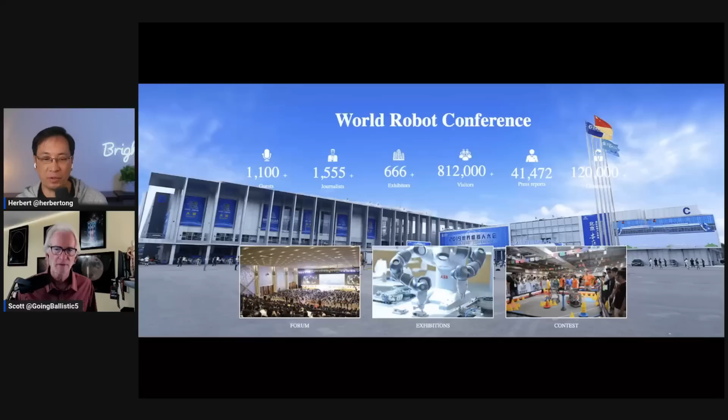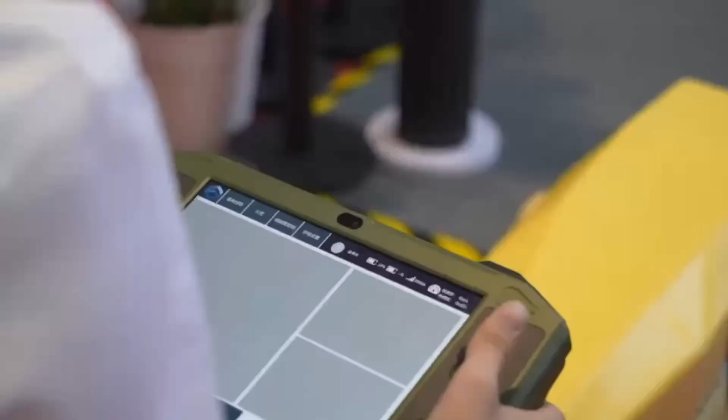Okay, so that was just looking at a 2-wheeled robot. Here's some humanoid bots. This is rather interesting, it's only got 4 fingers. Some flexible bots to get into very difficult accessible areas. That's a standard industrial robot, simple pick and place robots, and obviously some drones that can even flap. Again, that's a standard industrial or cobotic arm we're seeing there. So they're showing a mix of all the different types. It wasn't just humanoid bots, even though a lot of them were there. It looks like probably an exoskeleton of some sort to help assist, a type of lift assist that could be used. And of course, walking dogs—they've been very popular recently.

Yeah, I'm going to pause it here because many times you and I report on bots and we think the bot is doing it on their own. And I don't know, more than 70-80% of the time, it's actually a human controlling it, like this one. Yes. Now, what you see in the hand is what we call a teach pendant. Okay, so that's the controller. You see a big red button up there, which is the e-stop button, and a bunch of other controls on a flat screen that allows them to see what's going on, change the program, record positions, make modifications, and then let it run. A lot of times what the bots will do is faithfully replay what they were just taught.

So you showed a bunch of things and then it's just a playback. Others, it might be intelligent to do something else. Like here, this is a massage bot, which is probably just supposed to go from 2 different points, and along the way it's just trying to control the pressure that's on there. And then we're seeing also some pet bots here.

So that massage bot looked like a standard cobotic arm, it wasn't anything special. It was just outfitted with something a little bit different to allow it to maintain the same kind of pressure. So in this case, the trajectory is constantly changing based on the amount of pressure it's feeling as it's going over. It turns out to be a rather interesting, simple way to teach a robot to go over a very complex surface. You just say, start in one corner and go to another, and as it's pushing, depending upon the amount of pressure it's feeling, the bot either goes up or down. It's as simple as that.

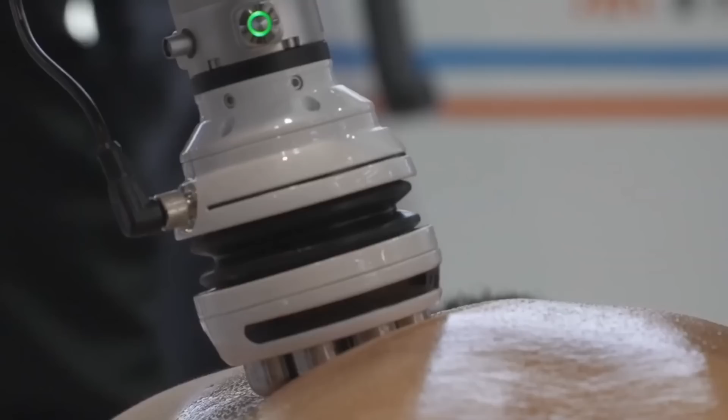Yeah, I think this is not just massage. I think you can see that those are 3D lipolysis that you can go to spas today, pay hundreds of dollars, and then they have a technician doing this on your behalf. Now you don't need to. And so it's actually going to take over jobs already, this one right here. It's pretty easy to be able to go over a surface, let's say you don't have accurate data on it right away.

And then, we're seeing some robotic pets. We've looked at a couple of them. I'm not sure what makes these things special. I remember seeing bots that looked very much like this, 30 years ago.

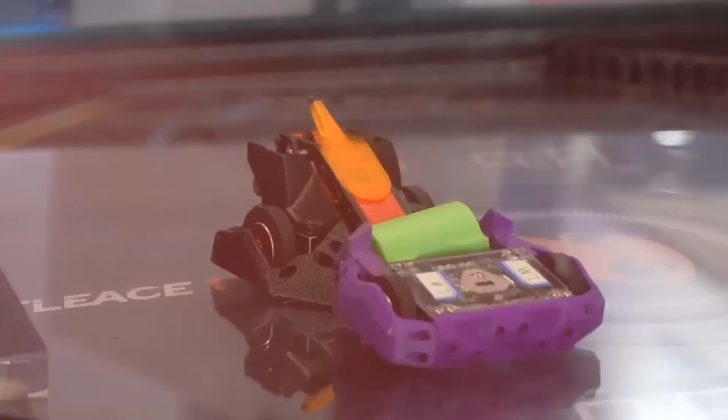And then, just some smaller ones that can be really good for teaching the next generation of engineers, I guess you can say, on how bots are working.

Again, just showing that you can do balancing with something like that to be able to move it around. I'm not quite sure what the point is. It's sort of like a Segway that's autonomous.

And this is a bit creepy, going back there for a second, because that reminds me of Doc Ock from Spider-Man. It's evidently something you can put on your back, and now you've got 6 extra arms. I'm not exactly sure what you would do with that.

The only thing I've seen even close to that is a surgical robot called Da Vinci that they use in a lot of surgeries, which seems to have all these arms all over the place to be able to do something.

I'm not sure how you would control that. Just imagine for a second if you were able to have some sort of brain implant, could you imagine trying to control 8 arms? Your 2 natural ones and then these other limbs?

Robots can, but I see that they all have fingers. But like you said, I think this is just more for demo. They all have fingers, which is one of the things you've taught us to be looking out for. And they probably have to have a lot of their own onboard control system to kind of do something, and you just kind of somehow roughly command it to do something and it just goes ahead and does it. Of course, it could just be for dance as well.

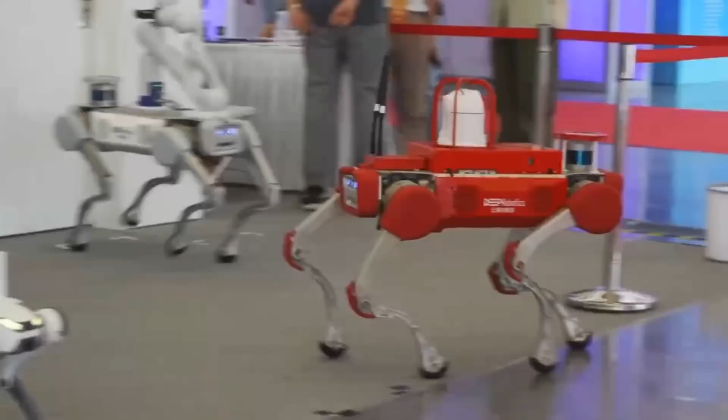And then I believe these are a couple of bots that were designed to actually be in the image of their inventors, kind of like the doctor in Star Trek Voyager, remember? So I know it got a lot of attention being able to see a robot that looked very human-like. I'm not quite sure what the fuss was about after looking a bit closer, because I've seen things like at Disney World for over 30 or 40 years already, where you have these animatronics that look very human-like.

So I'll be playing a clip that's going to show a little bit more of how these human-like robots work.

The dog bots are very popular now. There are many, many companies coming up with different versions of them. And now this one's rather interesting because it's got enough power to be able to do a flip like that.

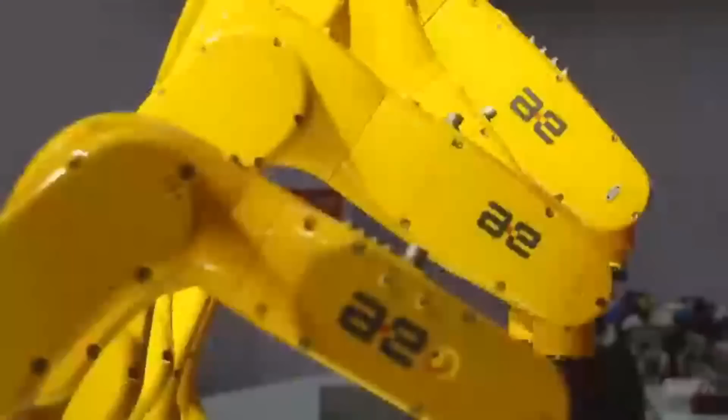These are just the old school bots, the old normal industrial robots. Nothing really new here that you're seeing, except that it may be yet another company being able to produce these, and then just showing different kinds of applications of cobots versus your standard industrial robots.

So like we said, some of these robots have been around for many years, but being able to do a specific purpose-built task, you don't need a humanoid bot for this specifically, but if they become cheaper and more widespread, then they're going to be very useful.

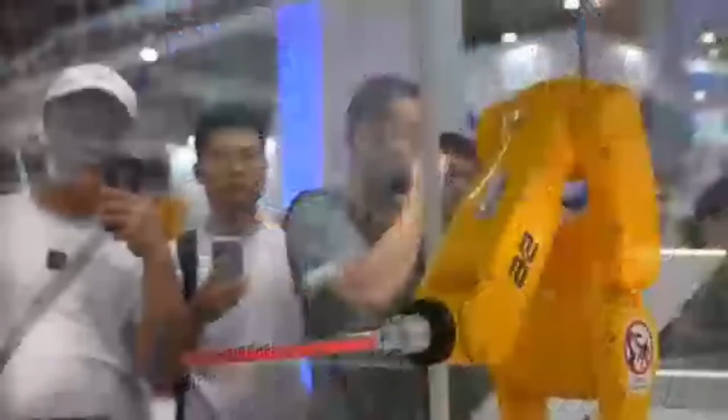Just this alone, right? The ability to make ice cream. Yeah, and they've been around a lot, these robots that can serve ice cream that have shown up at various trade shows for well over the past decade, if not longer. And it's not 100% clear that you really need a robot to do the whole thing. You could probably have a specialized mechanism that could also do it as well. But it's more or less that people like the attraction of it.

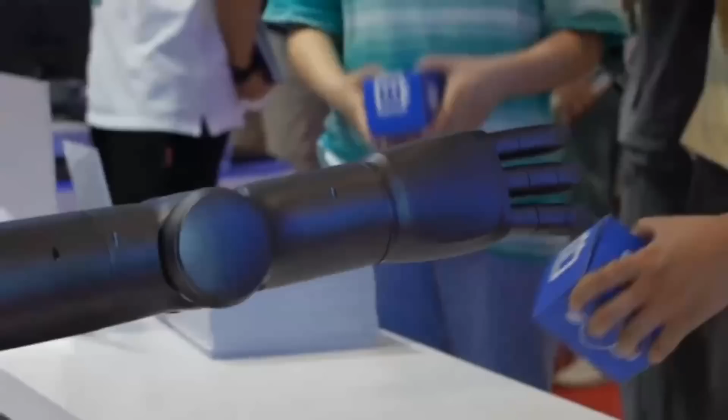And again, some more humanoid robots we're seeing there. I think both those are rather interesting. I kind of joke that these are cartoon bots, because you'll notice they only had 4 fingers rather than 5 fingers.

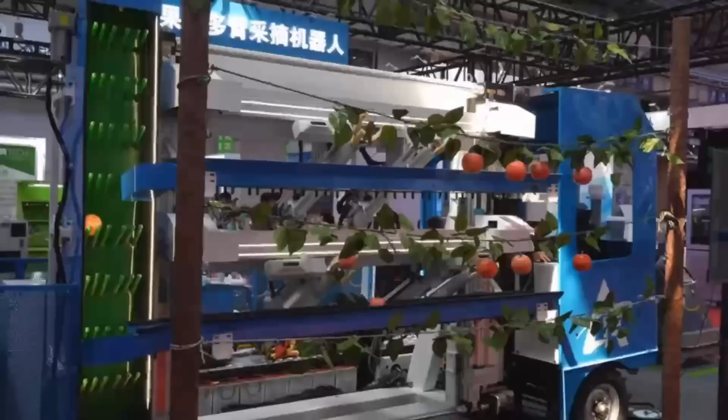So evidently in cartoon land, you're only supposed to have 4 fingers.

Again, agriculture, that's going to be a really big place for robots to be able to go and figure out how to pick fruits and do harvesting.

Oh my God, they saved the best for last. Did you see that? The birds. Yes, birds aren't real. They're not real. Oh my God, you're not going to be able to tell the difference.

But obviously birds make sense, right? Because if they can fly, they can have cameras. They can do quite a bit, and then it would be hard to tell a drone from a bird. Now, the one thing is that drones are kind of noisy, and depending upon how these bird-like drones work, they probably wouldn't be so loud and annoying, because a lot of people really don't like drones because they're louder than a mosquito and more annoying. So if you're able to come up with one that's a bit more silent, then it means they can be in stealth mode. You wouldn't know it's there, and people wouldn't complain about it quite as much.

All right, let's continue watching. This is another shot from ABC News about the human-like robots. And like you're saying, they're not that impressive. I think they have more, like it says here, upgraded human-like display, the blinking of the eyes, the movement. But they're like animatronics, like Disney. And animatronics has been around since the 19th century, so it's pretty old.

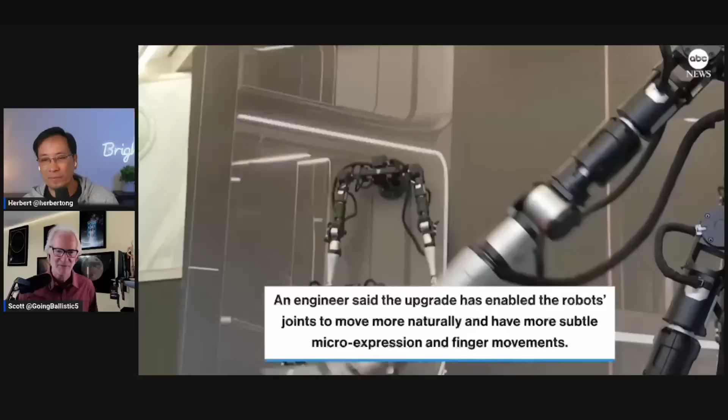And again, I don't know how you would control something like that. It's rather interesting, but I'm not quite sure what the application is.

It's one step moving forward, right? Just always human-like emotions. Yeah, from my standpoint of a humanoid robot, I think more of the effort should be in getting the bot to actually be able to do something useful as opposed to having facial expressions. So you'll notice most of the bots that are showing up out there, not just the Tesla bot, but all the others, they haven't really bothered to put on a face or anything like that because they don't see that as being an important problem to solve right now. There's nothing wrong with the fact that researchers are looking into that, they might come up with some really interesting innovations and ideas down the road. But you're not going to see Tesla, you're not going to see Agility, you're not going to see Boston Dynamics,

Sanctuary—they don't care. Having a bot with facial expressions doesn't really matter right now. And in the worst case, you just have a screen that can have some funny faces on there if you want to have some kind of emotion or something like that.

And of course, the problem with these faces is that, what they're putting up there, it seemed like you had a lot of historical characters there. Maybe, again, the whole idea is more or less animatronics. Now we can set up these Disney displays, the dioramas and stuff like that, that are very lifelike and constantly able to act things out without having an actor do it. But there's still very much that uncanny valley feel to it.

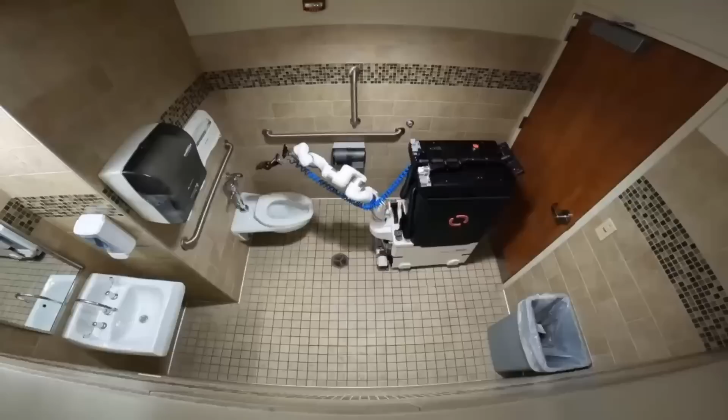Now, for some reason, they're not demonstrating it actually running a brush in there. It seems to be more like sanitizing steps.

I suspect that the main base they're on could potentially also do cleaning, because you've seen there are these in a lot of stores that are able to wash floors just by driving around. But the thing is, there are a lot of areas they cannot get access to, so this bot allows you to get all the corners. It's kind of like when you cut the grass, you can cover a lot of area, but you need the weed whacker to get in certain areas. So there's probably a combination of the two, all the surfaces and power that they need.

Perfect application of a one-armed robot that can do a human-like task without having to be a humanoid bot. I think something kind of comes out to keep the door open, so they thought of everything. The classic problem, the door always slams on you on the way out, hits you in the small of the back, but you happen to catch that.

Now, can this do every cleanup job? I'm not sure. I think what it's really good at is doing the standard maintenance of all the bathrooms, going in and doing the light cleaning and making sure everything is sanitized. I have a feeling, because they talked about being able to reduce your workforce by 50% or something like that. There's still going to be the case where you have the professional come in and figure out what's going on, but what this does is take the heavy load off everyone of making sure the bathroom has recently been visited and cleaned. And what that means is you can probably have more and more of these cleaning cycles, more common.

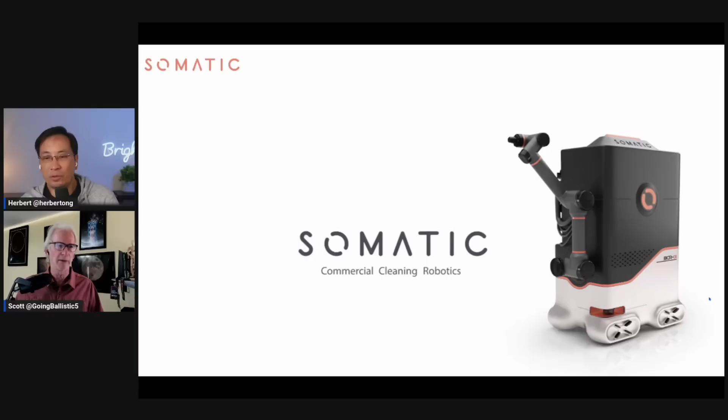No, it changed the hands, yeah, you saw that, it did. But it's all coming in proximity of everything else. You got to hope there isn't a little bit of contact from one to another as it's doing it. The wrist is in common with all those things, and eventually if things get dirty enough, things are gonna spread. So there might be some sanitation steps they then have to do on the bot itself to make sure it's not passing infections around the environment accidentally.

So here they're pitching it as high quality cleaning, low staff turnover, and I get this. I know people who worked at restaurants, and I was talking to a restaurant manager. The manager told me there's two kinds of restaurants: one expects its waiters and waitresses and staff to clean the washroom, and another hires a special cleaning team. People don't want to clean the washroom, and if it becomes part of their job, which many restaurants do, it's terrible. People don't like it. As a patron, I do not want my waiter or cook to be cleaning the bathrooms.

Yeah, no, so you really do want that separated for sure. A lot of times if you just do the continual maintenance, things won't get bad. Then every now and then some disaster happens and someone will have to go in. Usually if it's a good manager, the manager takes care of something like that. They'll realize, okay, we need someone to do it. Everyone else is doing their jobs effectively, so I've got to take care of this.

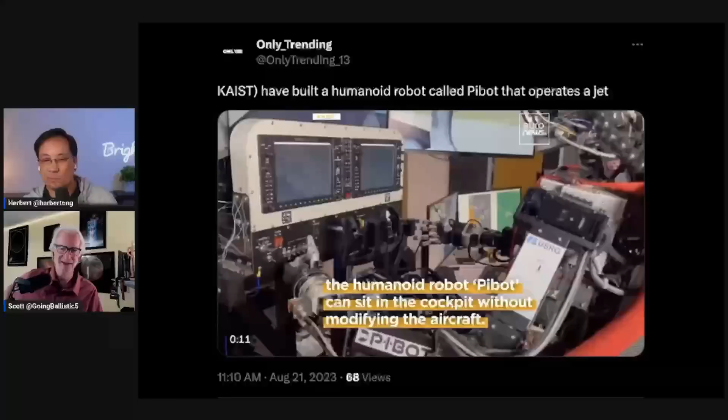Yeah, I'm not convinced of what I saw so far. Sanitization is basically what it did, yeah. And if you ever had to do that, you don't have to have worked in the industry, all you have to do is have had kids at home to know what it can be like to clean something up. They were just showing washrooms that are already clean. You got to show me a washroom that's really messy and then see how this operates in that mess.

And so we'll see. We'll see how that works.

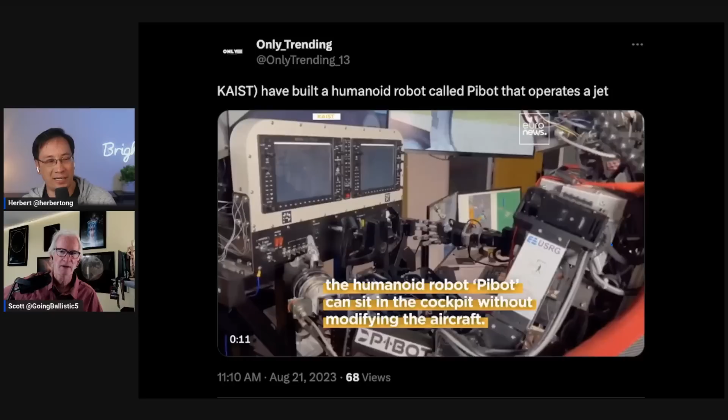The next story here is this humanoid robot they call Pibot that operates a jet. It sits in a cockpit without needing to modify the aircraft. It just knows how to operate the jet.

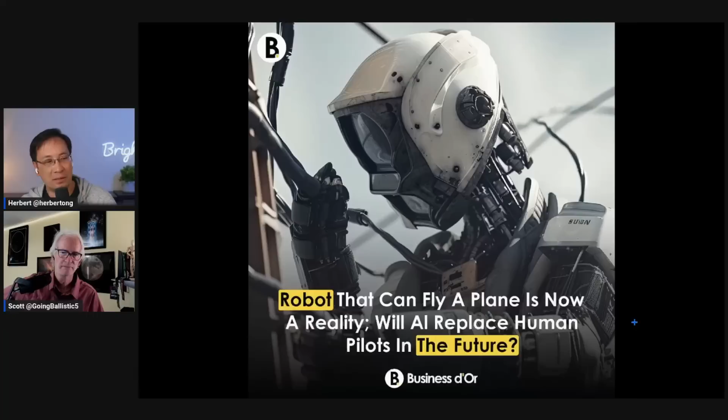This is from the Korea Advanced Institute of Science and Technology. These researchers created this. Not sure if this is actually sold right now, or if it's research. I think it's still a research project. I don't think it's actually sold yet.

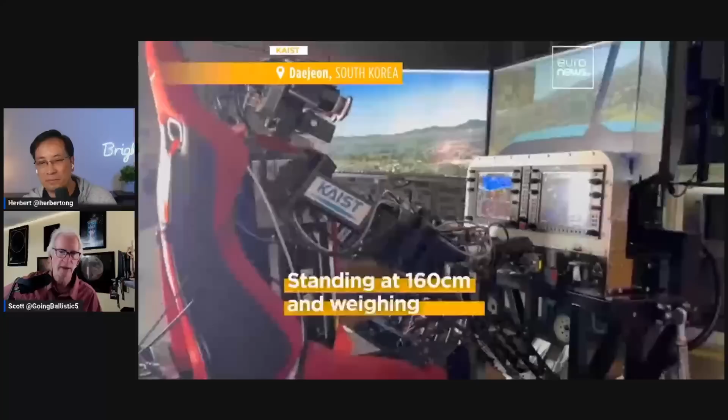It's demonstrated itself in a flight simulator. So it hasn't gone up in the air, but it's demonstrated that it's maybe qualified enough to do it. From what I saw, they were talking about it possibly costing $300,000 or so to purchase, not a yearly fee. But now, why would you need a humanoid robot to fly an airplane?

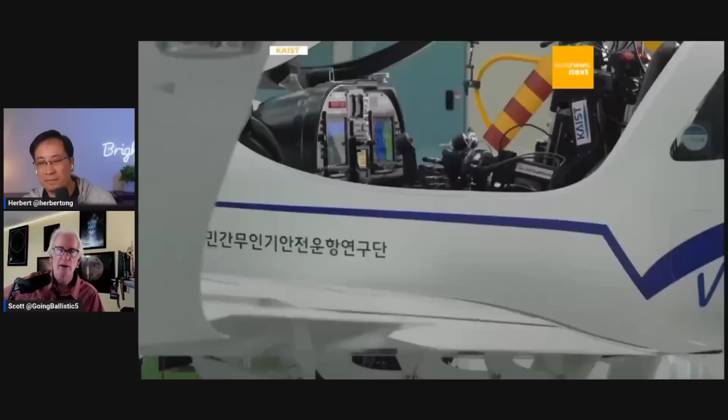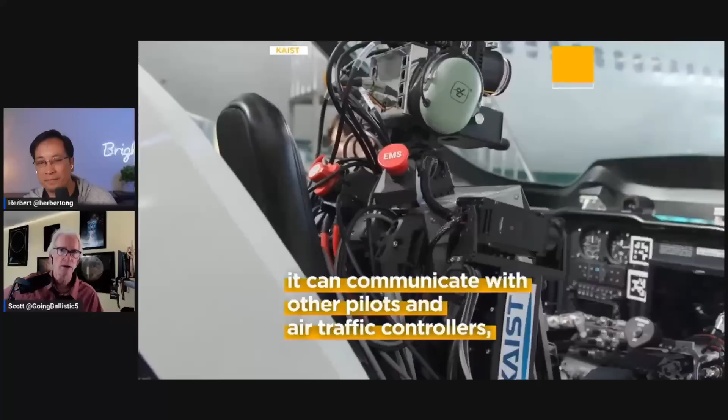I guess it's because there's different types of planes. If we're talking about commercial jets like Airbuses and Boeings, which are pretty much fly-by-wire nowadays, my understanding is just about everything can be controlled through the computer screens, and you don't necessarily need a humanoid robot going in there hitting all the buttons.

So I'm pretty sure both Chuck and Amy's jobs are safe. This is not going to take away their jobs, because there's a lot of other duties the captain and co-pilot have in the plane beyond just sitting in the cockpit. If you wanted to automate a lot of this, you wouldn't need to go this route. However, if you want to retrofit something that doesn't have all the advanced avionics and you're just using what's there, this might work.

Now, you and I are both in agreement that the Tesla bot will not be used for valet. This whole idea of having a humanoid bot going in and suddenly doing full self-driving doesn't really make sense when you already have something like full self-driving. It only makes sense for old cars that don't have that capability.

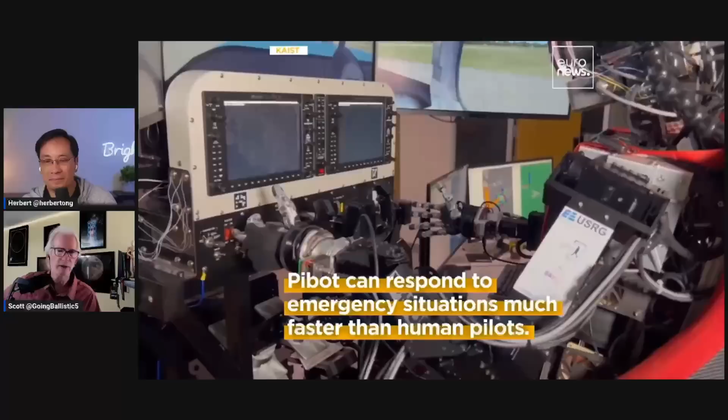But we also know the Tesla bot won't be able to get in and out of your car without probably doing some damage to it, definitely the seats. So the same thing here is this will have to be designed to be able to go in. And it's just replacing a pilot because you don't have one, I guess.

No, I think if you saw that, they talked about application—being able to be a co-pilot. They talked about it communicating with other pilots using ChatGPT, memorizing the manuals. This guy is now explaining it can actually be a support person rather than potentially taking over, so it will be a bit like Otto, the autopilot.

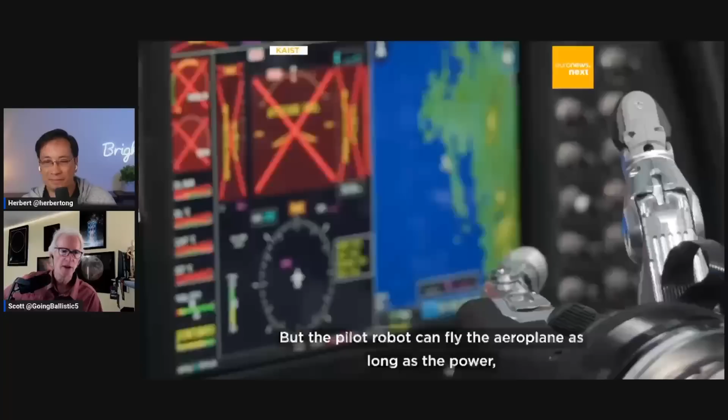It will actually take over the seat. And I guess if you have a chat interface, a lot of that could also be done without even having a humanoid form there. You could just have it done behind the scenes if your aircraft is set up so everything can be controlled through software—if the only way to do it is flipping switches manually or pulling levers because they're not automated, okay.

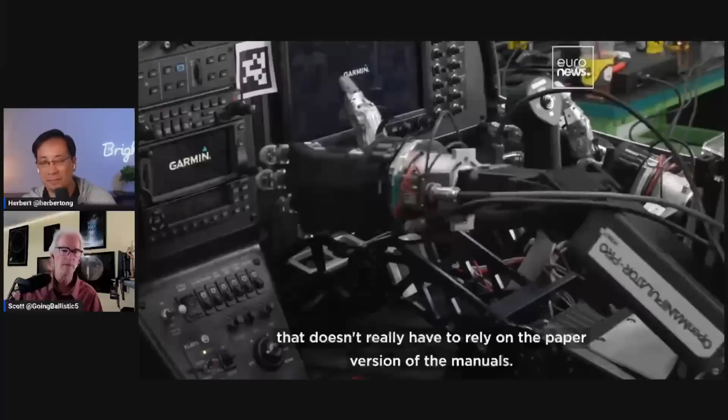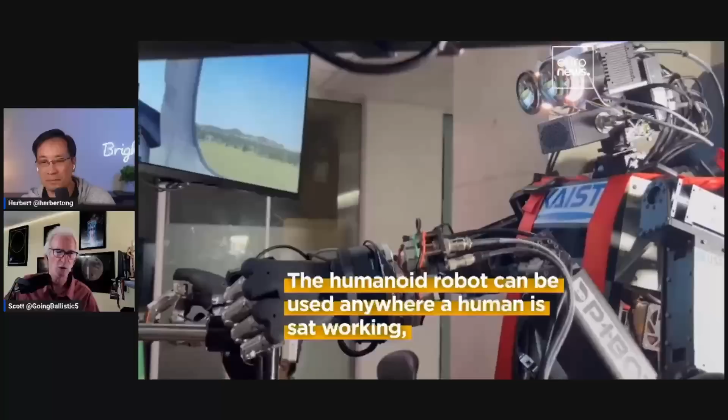But I would think a lot of that information—I'm looking at the Garmin controls over there, I don't know—this is a question for Chuck and Amy. Is that something that could only be operated manually? Is there an autonomous interface? In which case, maybe it has to be done with a bot.

And then, of course, the natural interface—you just tell it what you would like it to do. Look at that. They started with a plane, but it says you can use it to drive a car, tank, or sail a ship also. That sounds very much like a military application.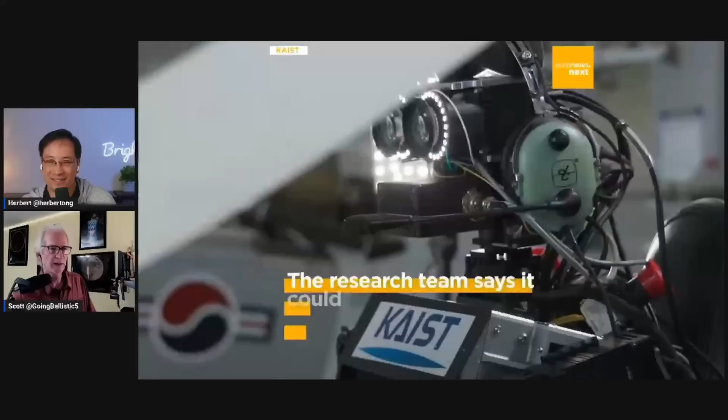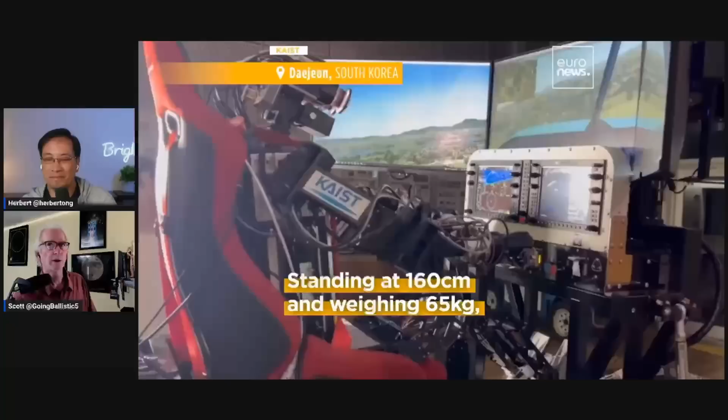Basically the idea is that you don't retrofit—you just use the workplace the human is already in without having to make any adaptations. I'm trying to think, if you had this flying by itself, what would you use it for? I don't know, like a crop duster or something, where you don't want to hire a pilot—you just put it in there and let it go over and do something.

Or if it's doing some sort of aerial reconnaissance, that typically happens, simple mapping. But a lot of those things, I think you can just build a special purpose drone to do it if you want to make it autonomous. A lot of the mass in these aircraft is not so much the payload you're trying to carry, but the fact that you've got human beings in there that you have to take care of. You have to make sure you provide everything they need, that they're protected, and that's a lot of the mass of the airplane. Take that out, and now you can make a special purpose drone for a fraction of the cost. It can probably do the same thing, deliver whatever it is you want to do.

So I guess there's a certain amount of skepticism on what the actual market is going to be. Certainly the future market, if you're looking at the inventory of aircraft we have right now, and we have a pilot shortage or something like that, well, okay, maybe. I think it's going to be used for military, and you're going to fly, like a robot driving a tank, and you're not sacrificing humans. The new aircraft being designed, meant to be autonomous, is not designed to have a human in there. It's purely autonomous, especially the new coming jet aircraft, because they're pulling G's that are so high a pilot can't do it. It's not physically possible. So if you want to do some amazing things up there, you don't want to have a person in there at all.

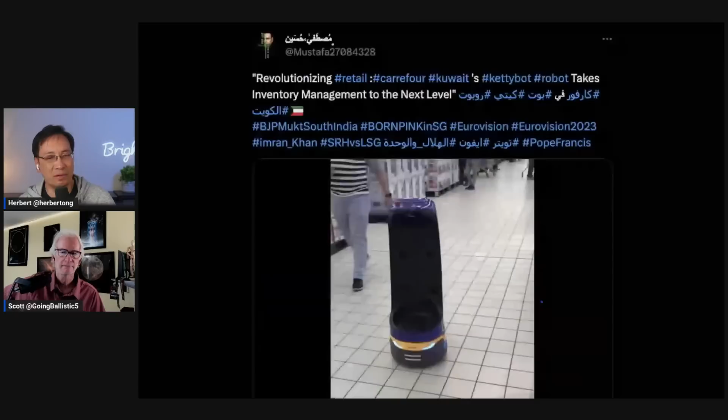Okay, next, the last story we have here is Kettybot. So this is a standard bot, I've seen this around, my Japanese restaurant has this, but they've lowered the price to under $10,000. It's being used for catering, for the mall, media display, guiding people. It looks like it has very little capabilities, but basically this one here is for inventory management, so it drives around the retail store and it can count things. So clearly it has something to do with that.

So let's watch a little quick clip here. I've seen that also in some supermarkets I've been in, where they're going around. I've seen those that automatically clean, I think in Walmart, I've seen them go around and clean the floors automatically, and others doing things like this inventory management, where they just keep scanning the shelves.

It's not something super sophisticated. I think what it is, is that you're just going to have to become more and more familiar with these things, just like we're used to having kiosks now when we go into Panera to order anything. Rather than talking to a person, you talk to a little kiosk. And now if you want to get service in a store, get guided around, it's more likely going to be something like this.

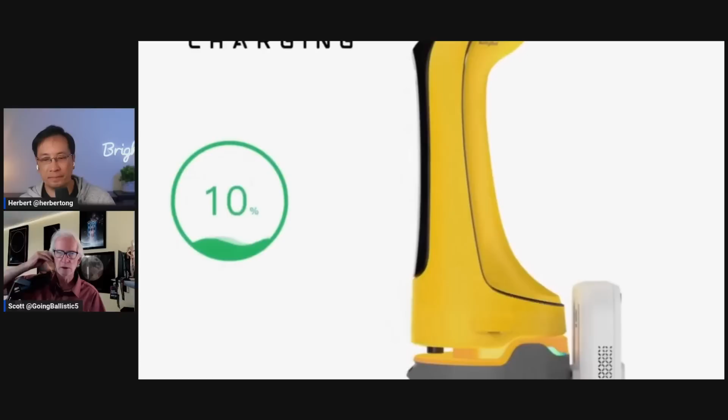And it looks like it can also be used for delivering. So they have the charging, and potentially it can be used to deliver something from one place to another. Now, I do know there are these autonomous robots able to deliver meals in city-like environments or in campus environments. It's almost like DoorDash, but without the car. The main problem they're facing is that when they're out in the wild like that, they tend to get vandalized, there's always someone that's going to knock them over. This is going to be the biggest problem in the future with these bots, the kind of environment they're going to have to be in to make sure they're not getting stolen, damaged, or vandalized, or that whatever cargo they have actually makes it to where it's supposed to be.

So it seems that society may have a little bit of a problem seeing more and more of these bots occupying the streets and going around, or maybe eventually they become so commonplace that we're used to it and everyone's happy to see them out there. So there's going to be a transition period for sure. I think my observation is that we are in the age of bots, and we're going to see many, many of these, and we're going to do more shows showing all of these as they progress.

When I look at the capabilities of the bots, I'm not terribly impressed, because we've seen this already so many times. There's advancements in humanoid design, the fingers and so forth, but it's really about the brains, the intelligence. And half of these bots we saw today didn't really have much intelligence at all. Others showed much improvement versus what they've had before. I think that's the part we've been tracking closely, which of these bots actually has intelligence.